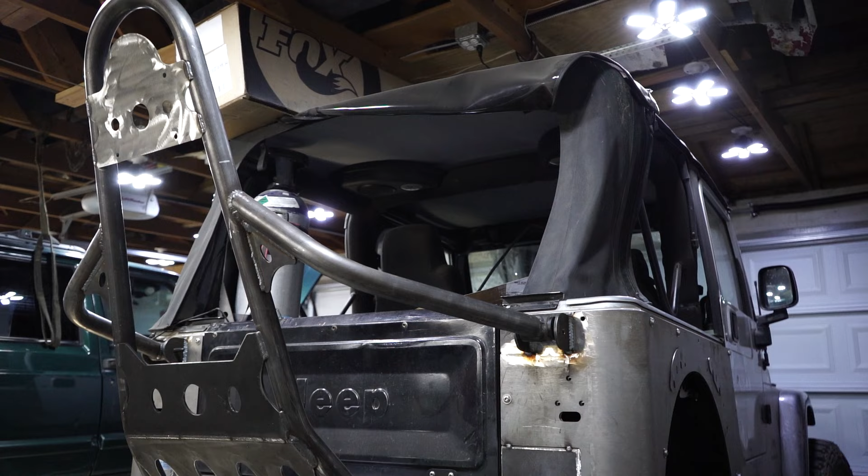Jake and I have been working on his Jeep Wrangler for literally weeks now to prep for our big Rubicon trail trip in July, and it's finally coming to the point where the suspension is done. The biggest part of the build, the suspension, is basically almost done, and we couldn't be happier. It's fully welded and painted, and so far we're extremely happy with the results.

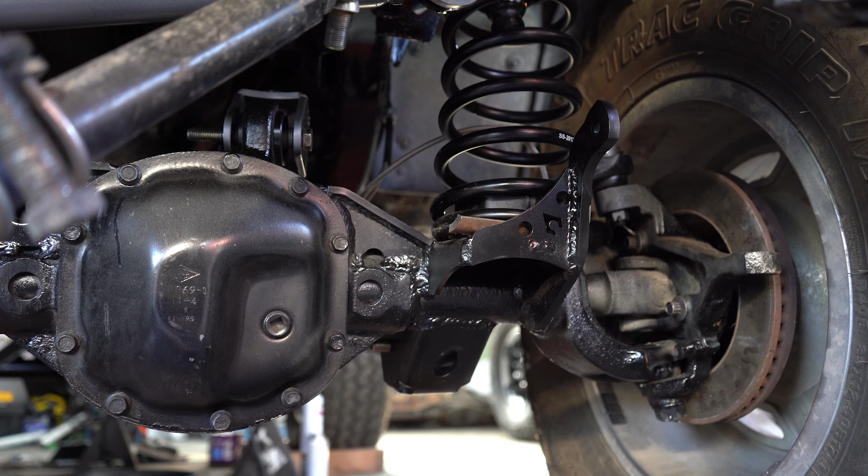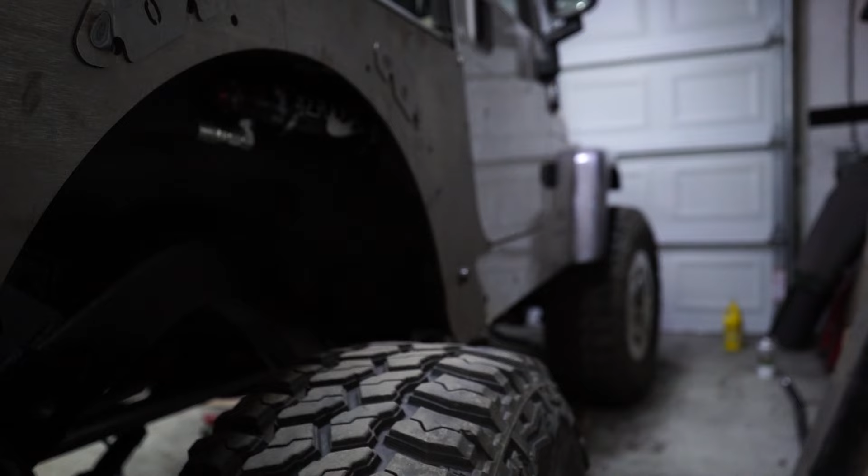Jake just has to do a few small things like fuel lines, brake lines. I think he still has to put an exhaust on it. Just small things like that, and we should be able to pull it out of the garage finally and take it out on the trail and test it out. So while Jake gets that stuff done, I finally have some time to start checking items off of the green Cherokee's to-do-before-Rubicon list.

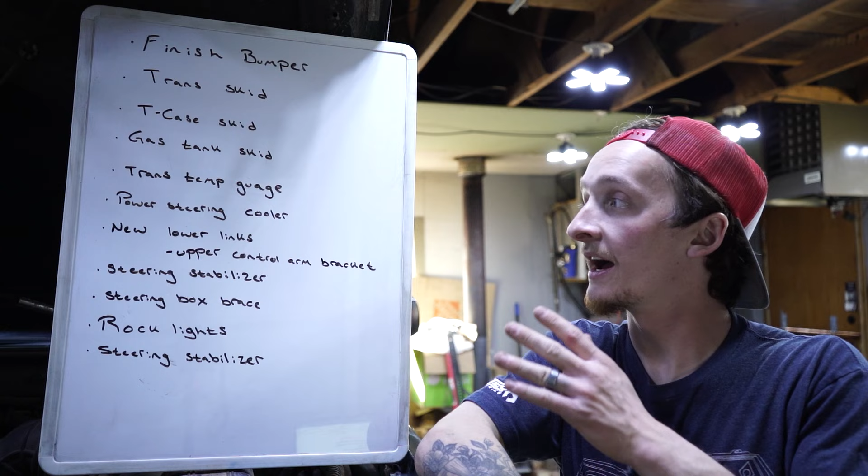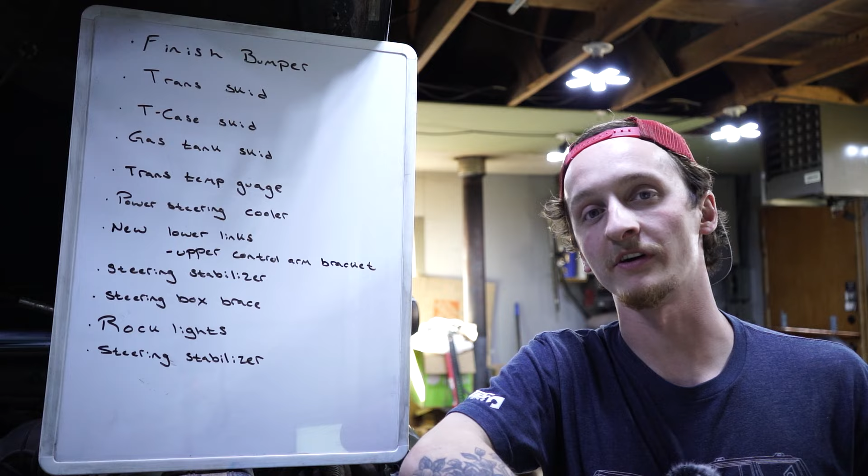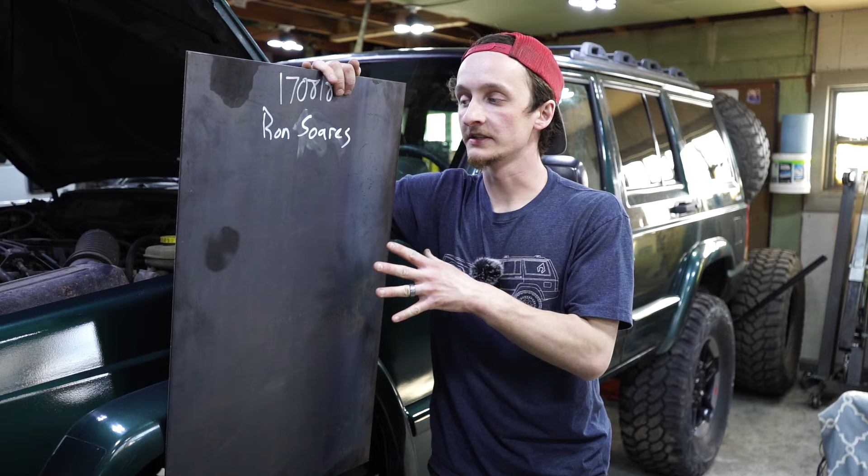So the first thing I'm deciding to tackle on this long list is the transfer case skid plate. The transfer case is low-hanging fruit, and it's definitely one of the top items underneath the Jeep that we don't want slamming against a rock on the trail. Ashley was kind enough to go grab this piece of metal for me. It's 3/16 thick, it's 1.5 by 2.5 feet, and this is going to be our transfer case skid plate. Now I'm going with 3/16 over 1/4 inch just so we can save a little weight on this thing.

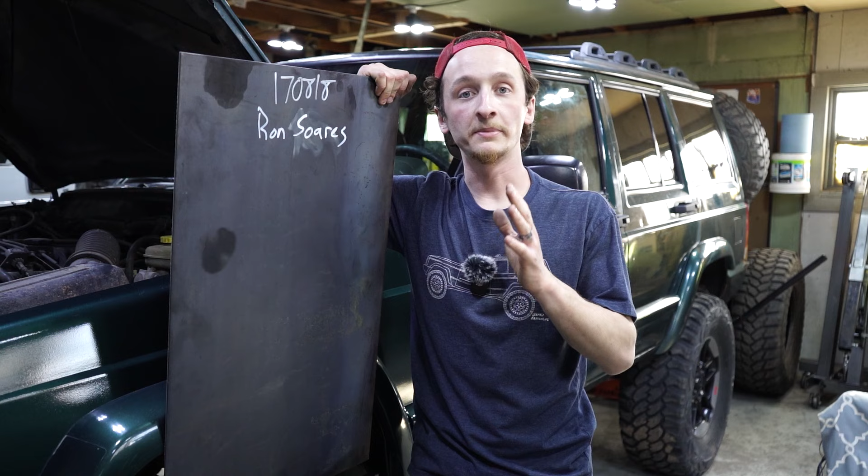3/16 by itself over a long wide span while flat can be a little flimsy. We found this out while building Jake's main skid plate on his Jeep. We ended up boxing it in a little, adding some bends and gussets, and there's no more bending or deflection, and it makes for a really strong skid plate. So that's the same idea I'm going to be using when building this skid plate.

Right here we have our 3-piece long arm cross member, and I want to have the skid plate welded to the center section here so it can all come out as one piece when I have to service either the transfer case or the skid plate. And it's going to come up and over. We're going to put a few bends in it to the unibody, and it's going to be bolted to the unibody right here. So basically we're going to have multiple points where it's attached to the Jeep, so it shouldn't have an issue taking a hit from any boulder on the trail.

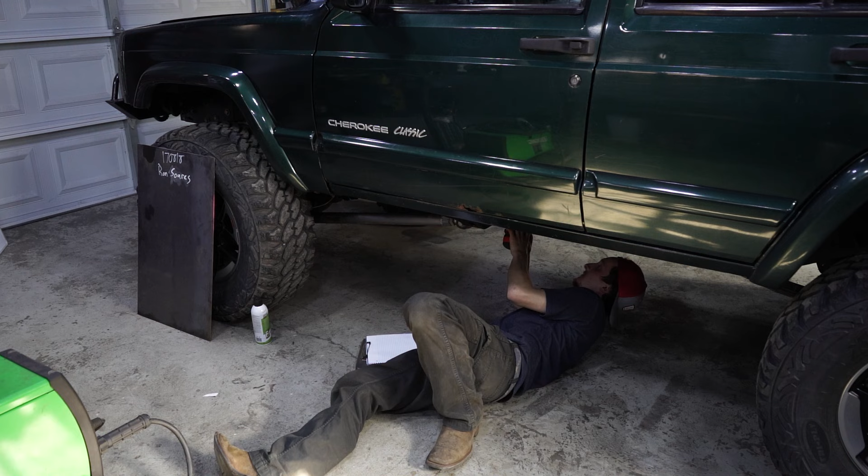The first step I take in a project like this is taking a ton of measurements. I have a pretty good idea of how I want to build this skid plate, so I just need to grab a few basic measurements so I can design this piece on the computer and get it cut out on the CNC.

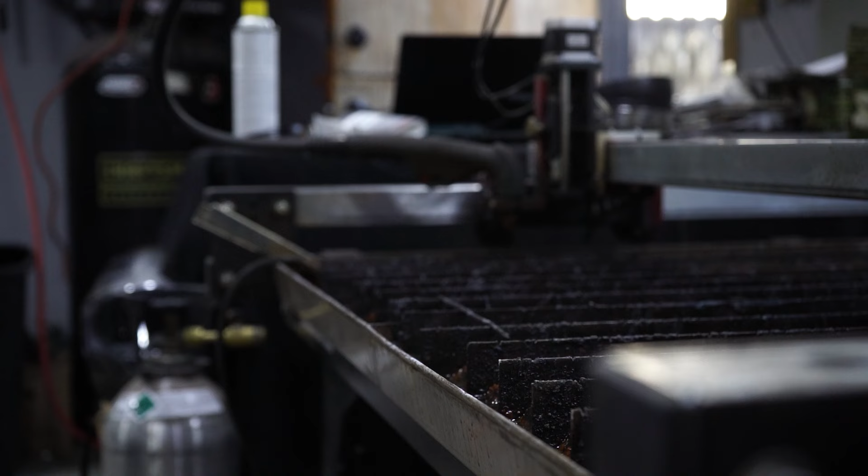In order to get the most out of a sheet of metal, especially like this one where I bought just enough for what I needed, I square it up with the CNC so I know the edge of the sheet will be parallel with the lines to be cut. This is also a good way to maximize the material left over for use on future projects.

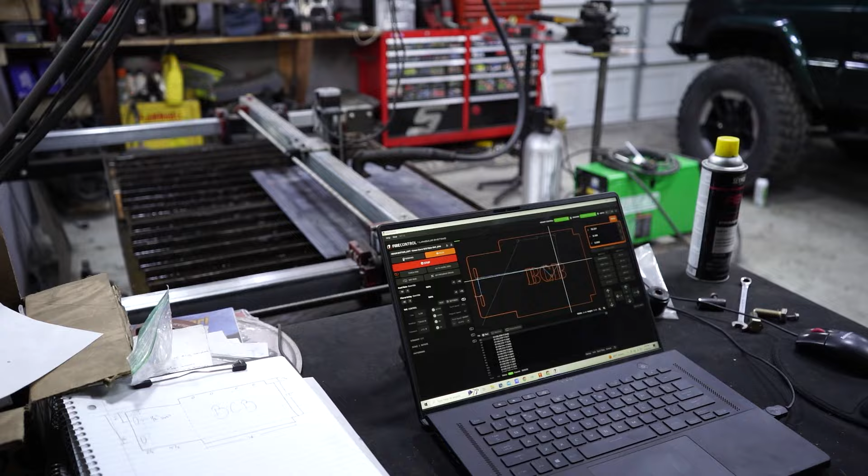In cases like this, I'll usually perform a dry run just to be sure that the CNC will be cutting where I want it to.

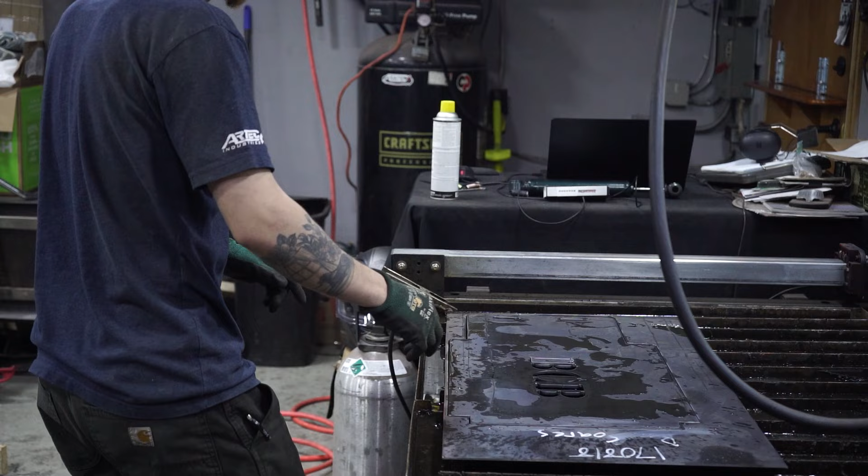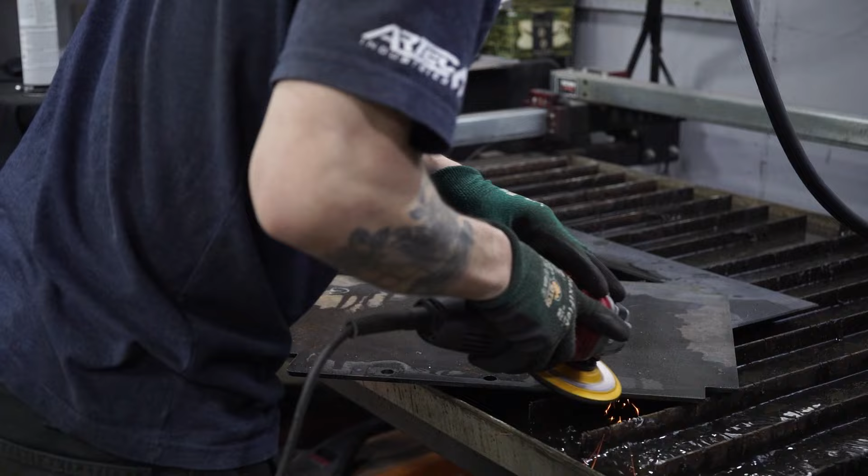This machine cuts extremely well, especially 3/16, but I'll usually take a flap disc to the piece anyway, just to be sure to clean off any sharp edges.

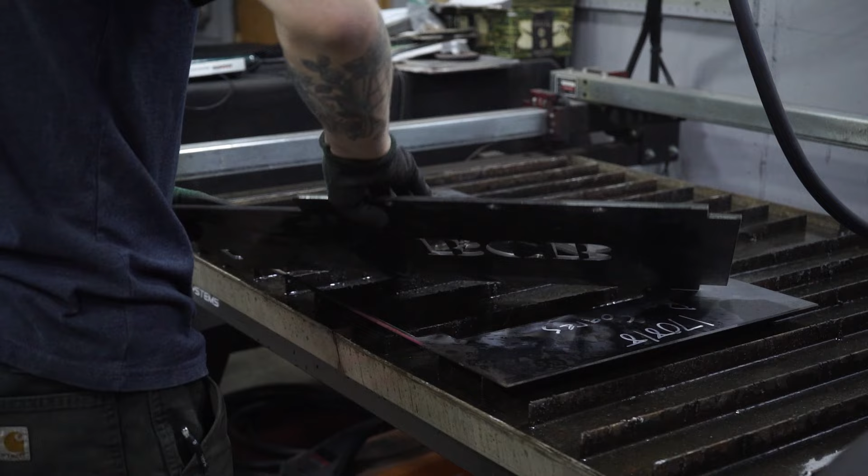So like I said, we're gonna make a few bends in this piece. These protrusions right here off of the main piece, we got 3 of them right here. That's what's gonna be bent in to kind of form the box. And that, like I said, is gonna give this piece its strength. And then this big protrusion right here is gonna have 2 bends in it, and that's what's gonna come up onto the unibody and bolt up to it right there.

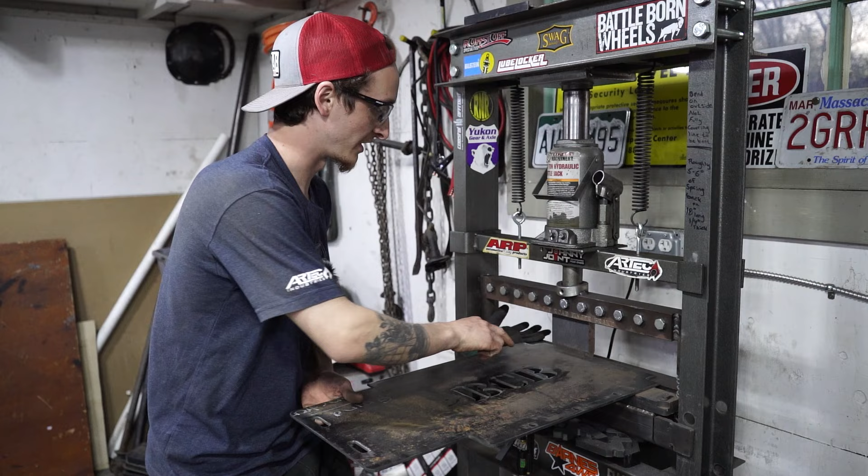Now, I thought of an issue as this piece was getting cut out. It's kind of by the design, but I decided to continue anyway with it, because we can solve it pretty easily. So basically, we can get to this bend right here no problem. I got more fingers that fit into this thing, so we can bend that down, no problem. And then the piece that comes up to the unibody, we can get the 2 bends in like that, no problem. The issue is with these side pieces right here that we need to bend in. I can't get it into the bender all the way because the side that comes out onto the unibody is getting in the way, because basically my bender, or the press, is too small. So that's an issue, but there is a way around it that I've used before in situations like this.

For these 2 bends that we can't get to with the bender, we're gonna be taking this piece back to the CNC, and we're gonna be cutting slots about every 2 inches or so, in a straight line right here, and then right down here as well. And then we'll be able to clamp this piece to a nice flat, straight surface. Actually the edge of my fire table has worked really well in the past, as opposed to the wooden bench, because the bench wants to shake around. And then we'll just take a hammer to it, beat it down until it's 90 degrees, and then we can get to welding. And then once it's all bent into place, we'll just go back and fill in those cuts with some weld.

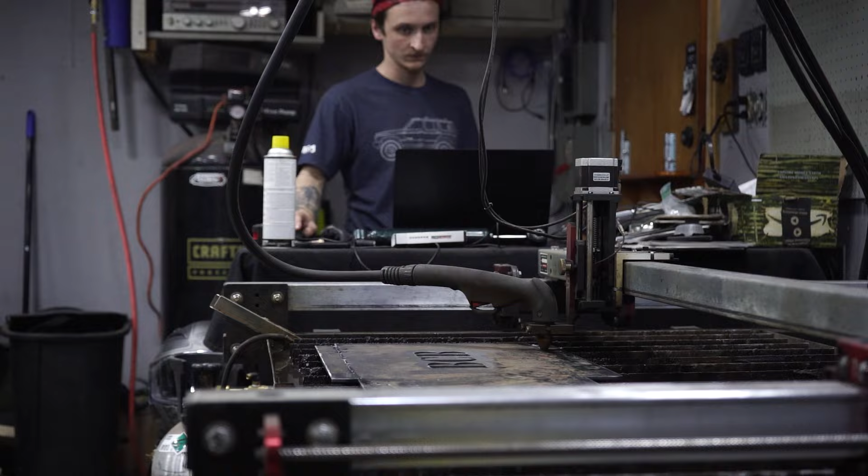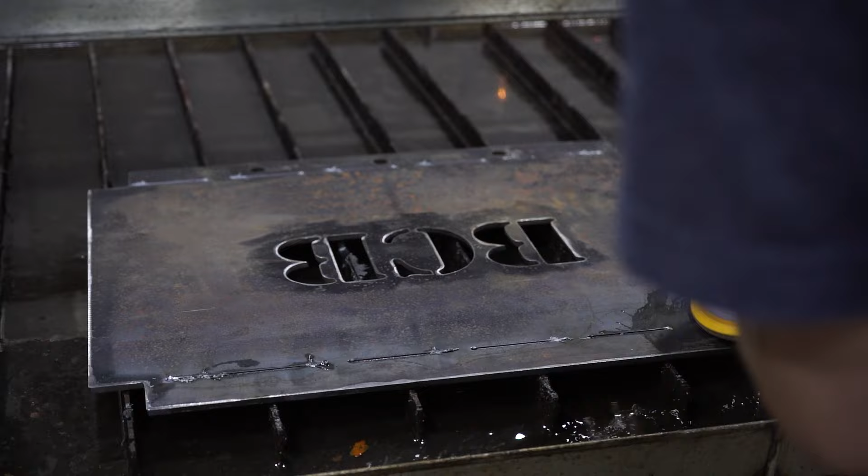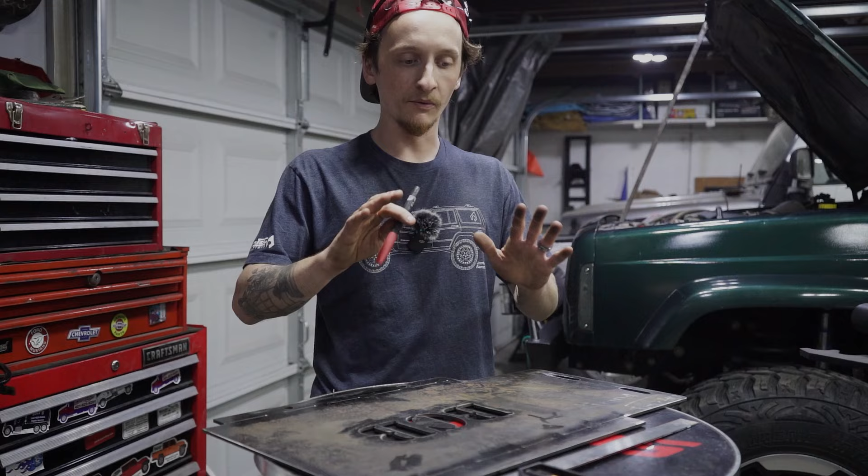So now I just need to figure out which bend I want to or need to bend first. And I say that because we got quite a bit of bends to bend on this piece. We have 5 bends. We got 2 right here and 3 around the outside right here. And I think I'm just gonna choose to bend the part that goes up to the unibody first. And I say that because I don't think any of the bends are gonna get in the way of each other. Say if I bent these first, they're not gonna get in the way of the bender when I go to bend the bends down here or up here.

I take that back. If I bent these first, I would have a problem bending this in the bender, just because with these being folded up, I wouldn't be able to put it in the bender the right way and get the 90 degrees out of it. So with that being said, I'm gonna stick to my plan. I'm gonna start with the part that comes up to the unibody right here.

I also wanna make sure that I'm bending it the right way. So this is the bottom that's gonna actually be facing the ground. So I'll just mark that so I can remember and I don't get screwed up. And I know it's the bottom just because the words are facing the right way.

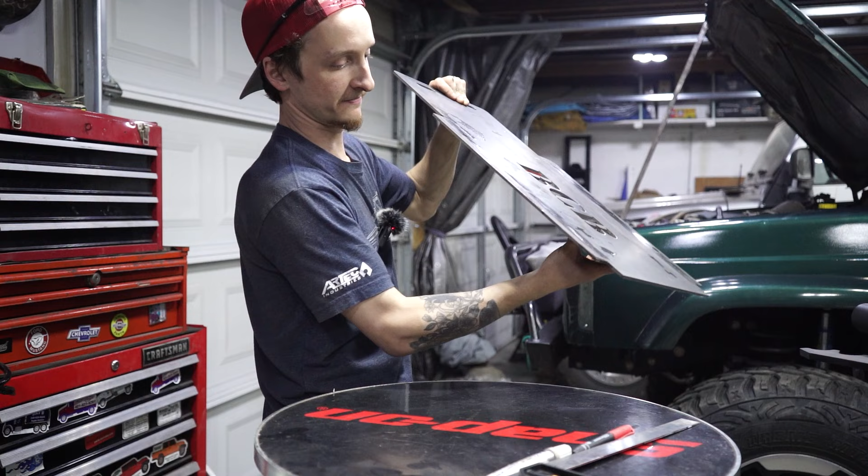So if we look at it like this, with the bottom facing the ground, my first bend has to be right here, and it has to come down like this, which means it has to be pushing this way, which means I need to make my mark on this side like I had it. 2.5, 2.5. Draw a nice straight line with this. And we've got our line. Simple as that.

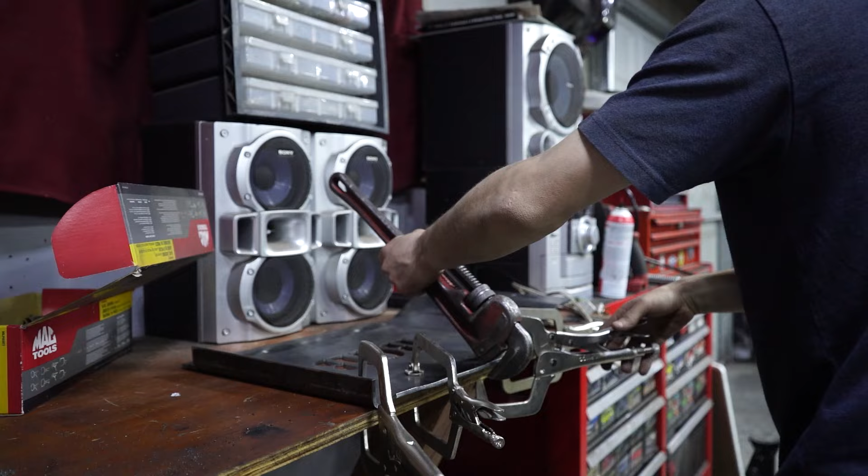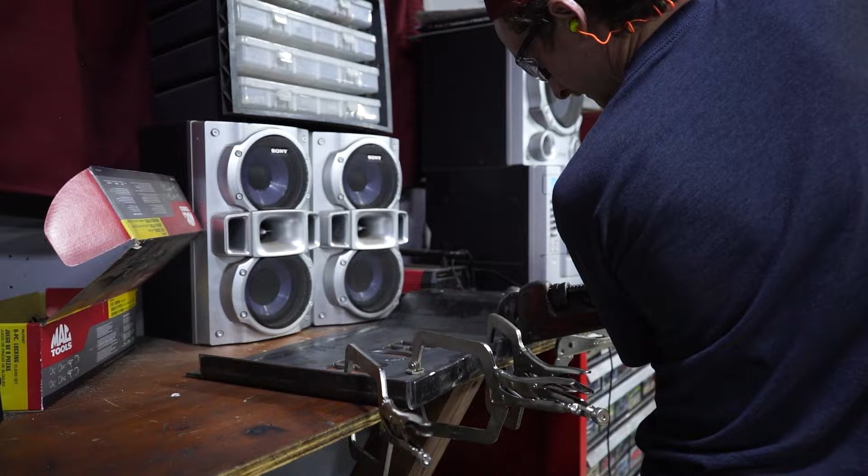In the past, this trick has worked out great, but then I realized the other times I used this trick was on 1/8 inch and not 3/16. The 3/16 was much too thick to bend this way, so I decided to bring it over to the bench and try another way. This is definitely not the best way to do this, but in order to keep this all one piece, this is what I decided to do. In the future, I'll definitely be investing in a larger press brake for situations like this.

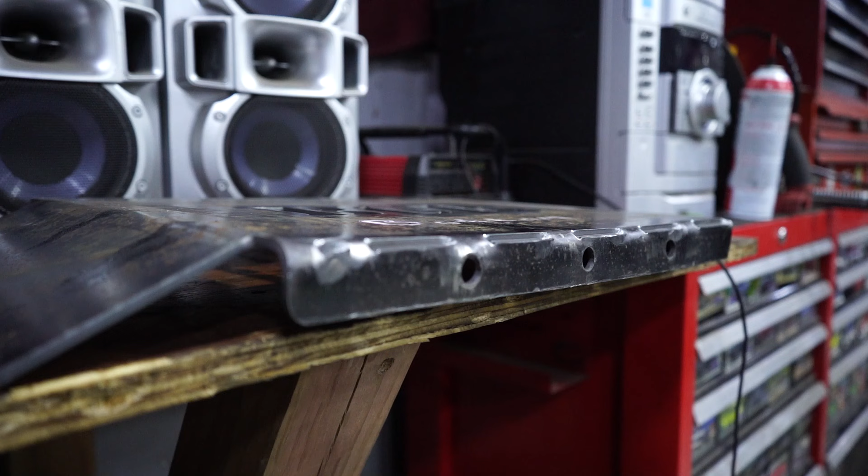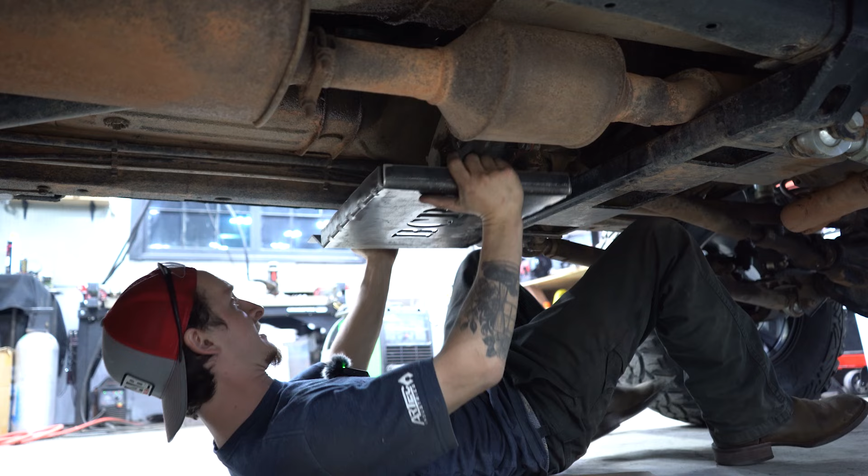This thing is coming out so sick. So that is exactly how I imagined it. Look at that transfer case. Well, I don't know if you can see it that great from there, but that thing is tucked away now. It's completely hidden by this skid plate. This is coming out pretty good, I like it.

Now the next step is to get this skid plate welded to the cross member right here. I think I'll probably end up taking the cross member out for that. I'll probably tack it while it's in the Jeep, and then I'll go ahead and take it out and we'll completely weld that all together. Then we'll get some bolts up in the unibody right here. And I mean, this thing seems strong already. It's gonna be crazy once it's all bolted together and welded up.

So like I said, these slots that we cut with the CNC, we'll also weld those. We'll weld the corners right here. And this thing is gonna be really stout and just really solid. I'm thinking if we ever get high centered on this or anything, at least we're not getting high centered on the transfer case. That's definitely a plus, but I don't think there's gonna be any problem with this holding up or anything.

So like I said, the next step is to start welding this together. But it's getting pretty late. It's already about 10:30, so I got a late start for the day today. I think I'm gonna head inside and we're gonna start welding first thing in the morning.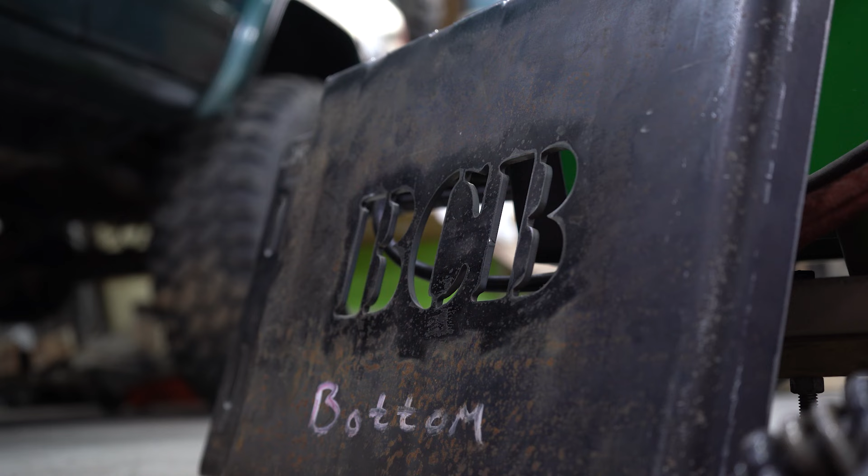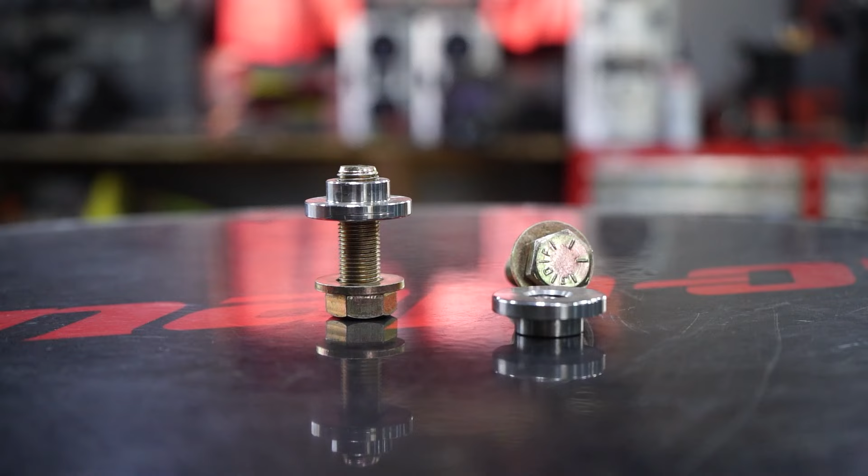So the first order of business this morning is to get the skid plate tacked onto the cross member of the Cherokee. I'm not gonna be fully welding it yet though, because I need to mark where the holes need to be drilled on the unibody. I'm gonna be using these threaded weld washers at the unibody. These get welded into the unibody and you're able to thread a bolt into them.

These two in particular are leftover from Jake's Jeep build. We welded these onto his frame and they came out great. The unibody on the Cherokee is much thinner than the frame on the Wrangler though, so I'm hoping we're gonna be able to get the same results.

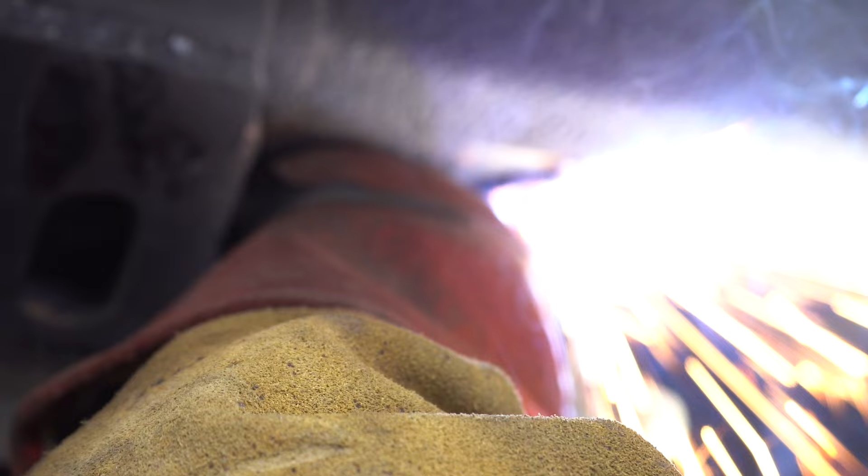This is the first one I welded in there. I had the heat turned up a bit too much for the unibody, so it's not as pretty, but still strong. Then for this one, I turned down the heat and was able to get some really nice looking welds. Overall, I'd say this is what I was expecting and this was what I was looking for. So now we can get the skid up here and start welding it onto the cross member.

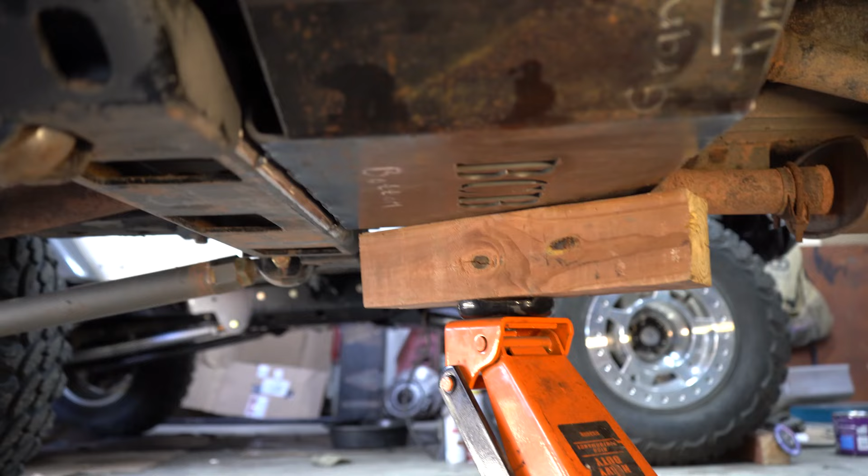So I got the skid up here. It's not tacked onto the cross member yet. It's just held up by the jack and then the two bolts right here. And you can see I decided to put a spacer on this back bolt in between the skid and the unibody, just because there's a curve to the unibody there.

I want it to sit flat. I don't want it to sit crooked. And with this thick spacer I had, it actually sits perfectly flat, left to right and front to back. So that's really cool.

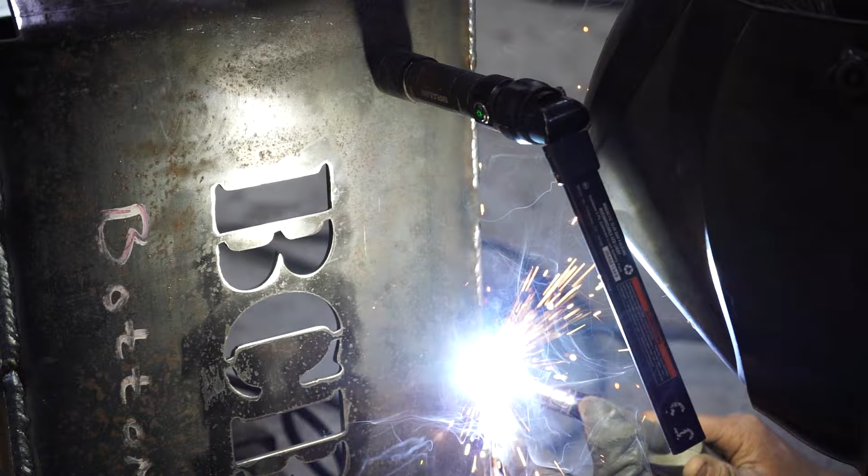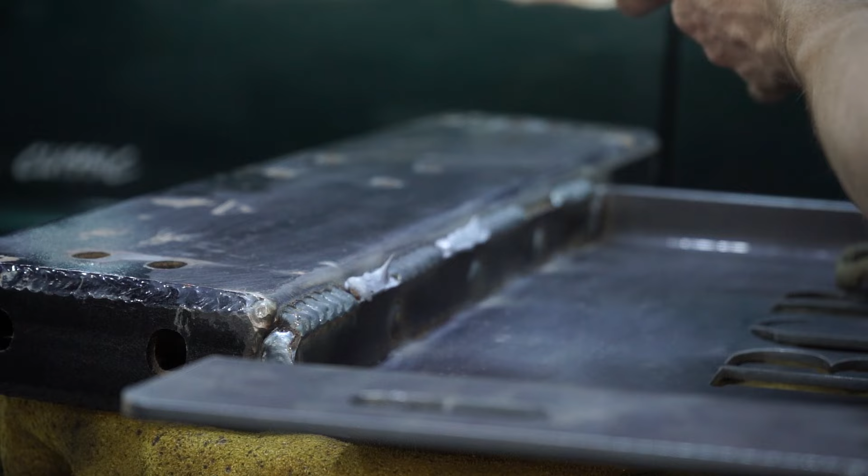Add in this small triangle here for some added reinforcement. And since I stitch welded the top of the skid plate to the cross member, I added a small amount of seam sealer to prevent water intrusion.

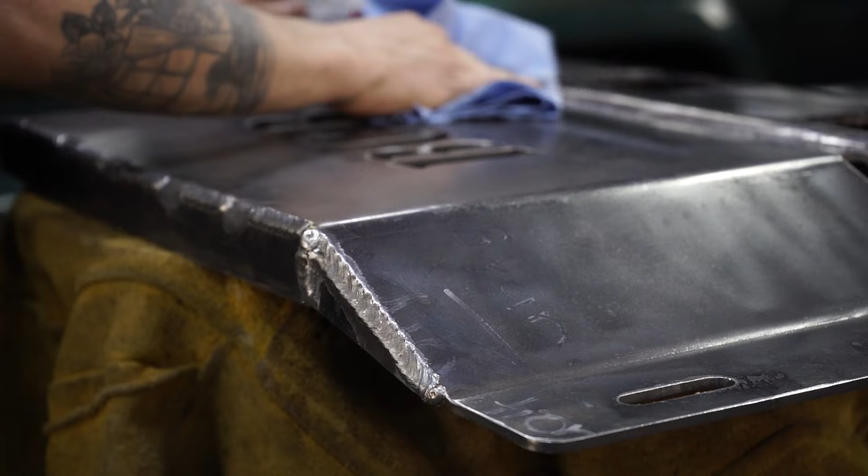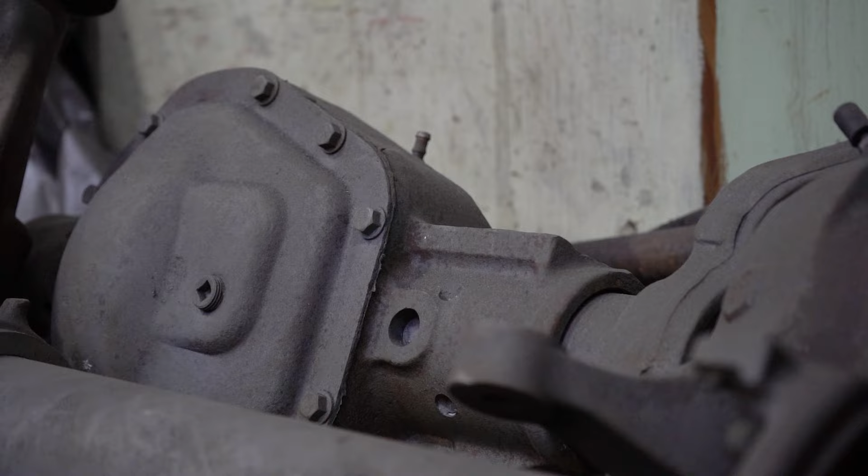Now I very rarely will use a rattle can to paint literally anything on these Jeeps. I'll usually pull out the paint gun and use quality paint, but in this case I only have this small part to be painted, so I decided it would just be best to use a rattle can primer and gloss black instead of taking the time to pull out the paint equipment. In the near future, once the 1-tons are built and ready for paint, I'll remove this skid plate, sandblast it, and paint it with everything else with the good stuff.

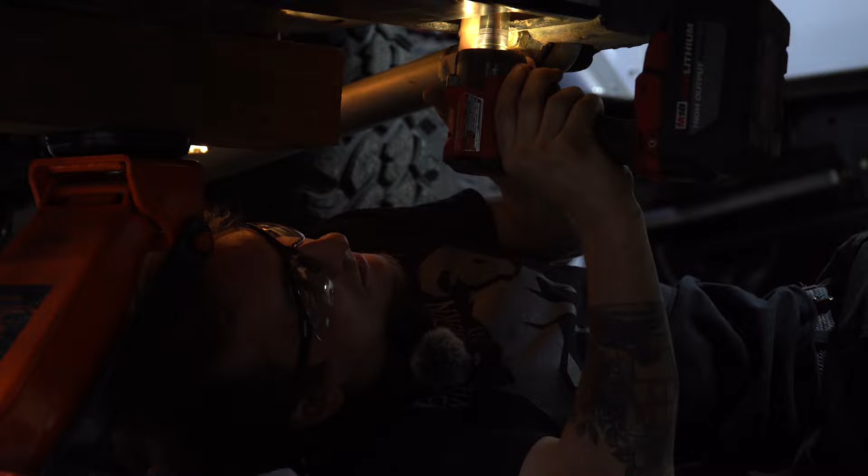Do you wanna? Who's that? Literally just this one bolt that needs to go in is really tough. Mm-hmm.

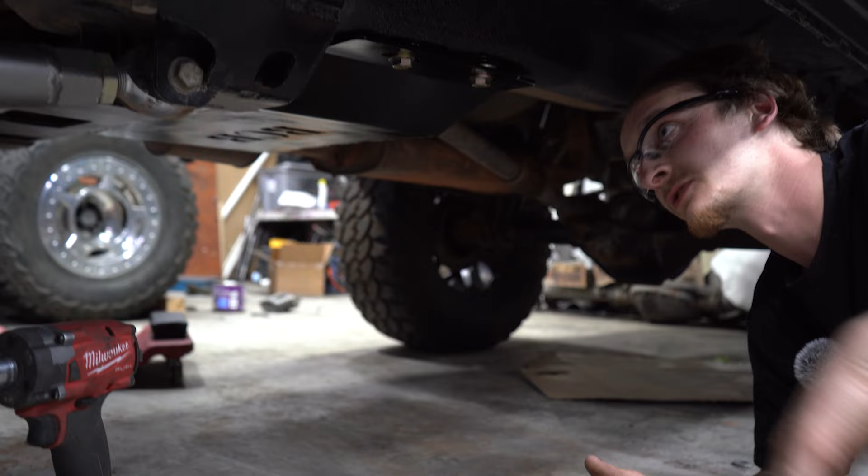So skid plate is all installed and it's looking really good. I'm pretty happy with the results. Not super happy with the rattle can paint job. Out in the sunlight earlier, it looked not too great. I wasn't too happy with it. But now on the Jeep, it looks fine to me. And like I said, when we have more parts to paint, we'll probably strip this, sandblast it, and get it painted with some good paint. But for now, I think there's no problem here. It's just gonna be a few months or so.

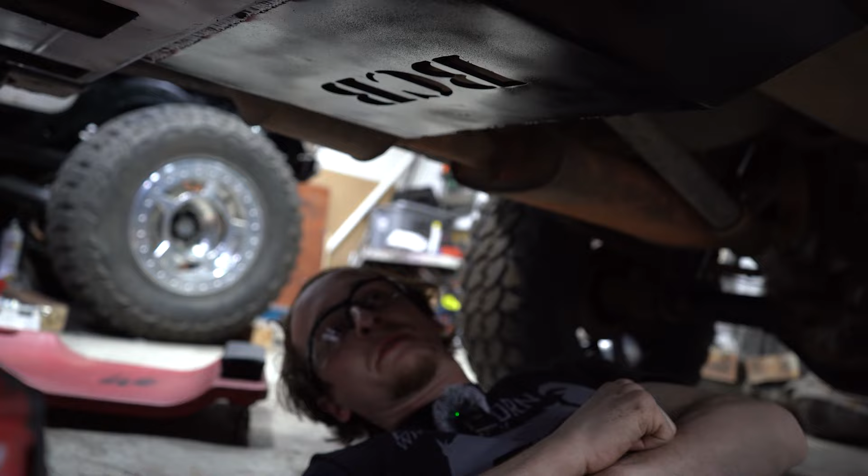But this thing, this is really strong. I mean, I'm literally picking up the whole Jeep doing that. You're picking up the whole Jeep? Yeah. That is impressive. So that's pretty solid. It could probably get beat up, maybe dented a little bit if we hit the right rock, but I don't think it's gonna go anywhere. I think it's gonna definitely keep our transfer case safe, which is the whole idea behind it. So, pretty happy with that.

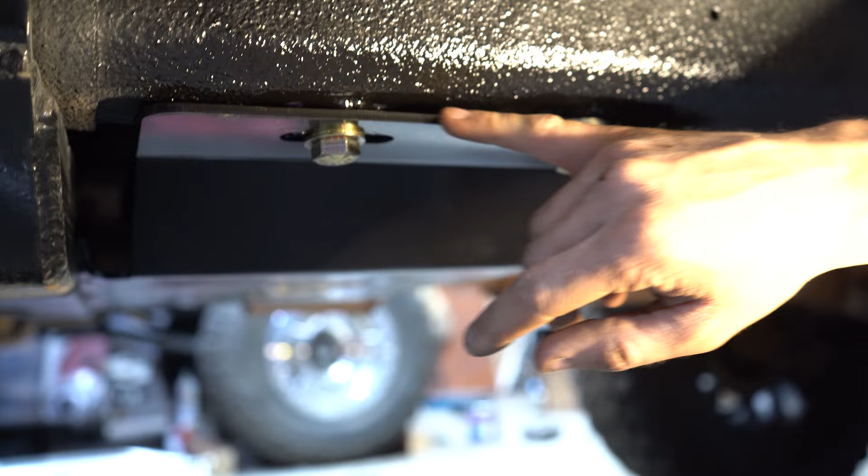Nice, quick project. So right here you can see that spacer we installed. We got the weld washers in the Jeep. They're all painted up. They look nice. Got the spacer, and we got the plate sitting nice and flat. And we don't have any problems there. That came out pretty nice. I'm pretty happy with it. Hello, ding.

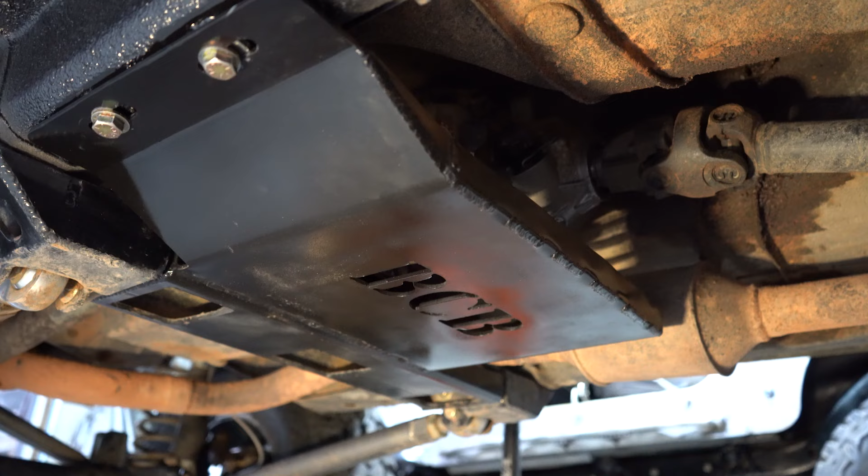So we have a long list of things that we want to get done to the Jeep before we bring on the Rubicon later this year, and that skid plate was definitely one of them. Yep, definitely just a nice small project we were able to get done over this past day and a half or so. But I'm glad it's done, and I'm glad we're starting to make progress on this thing. We've been doing a lot of work to Jake's Wrangler. It's nice to be able to work on our own stuff again.

Yeah, and to be honest, I had absolutely no part in it. I didn't even know Ron was going to be working on this project, but I really like it, and I like the nice, unique touches that it has for the Backcountry Beagles. Yeah, so it's exciting. I think it's pretty cool. We've got a few camping trips planned for the near future. We're gonna be taking the green Cherokee, maybe testing out the skid plate, hopefully not. It's one of those things that you're gonna have, and hopefully you don't need to use it, but I think we'll definitely use it on the Rubicon.

And we have not been camping or off-roading or overlanding in a very long time, because it's just been too cold. It got to a point where we went winter camping or cold weather camping quite a bit, like weeks in a row. It gets old really quick. Yeah, we got the diesel heater and whatnot, but it got old quick. But we're really excited for the warmer weather so we can do some warm weather camping. Yeah, definitely. We're gonna get our tan on.